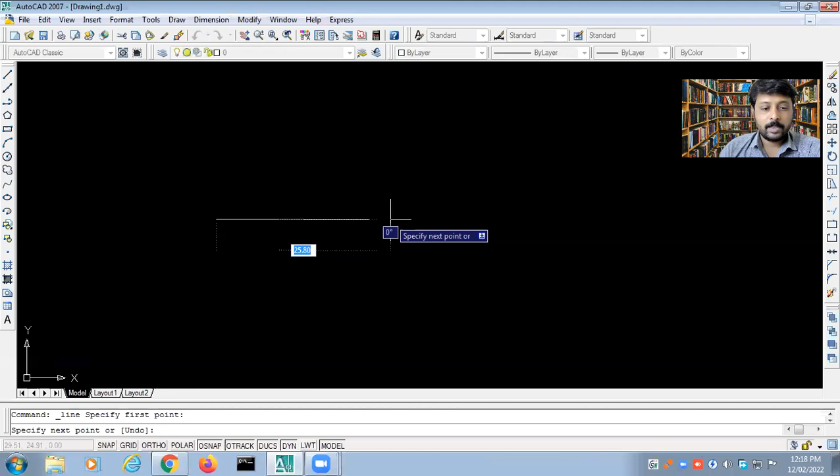So first we wanted to draw a rectangle. So we started with the first point, then we took the length as 10 mm and angle as 0. So we got this line. Then we took the height of the rectangle as 5, so we mentioned it as 5 and the angle should be 90 degrees. So this was looking like this.

Now we had to complete this on the left side. So we had to take the length as 10 and the angle was 180 instead of 0. So yesterday we discussed it, and we got 2 points, and by using escape we are getting this rectangle. This was the thing we were discussing yesterday.

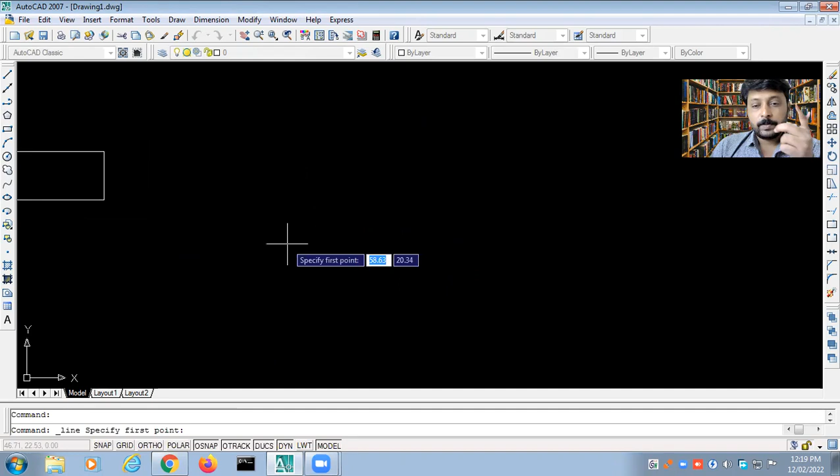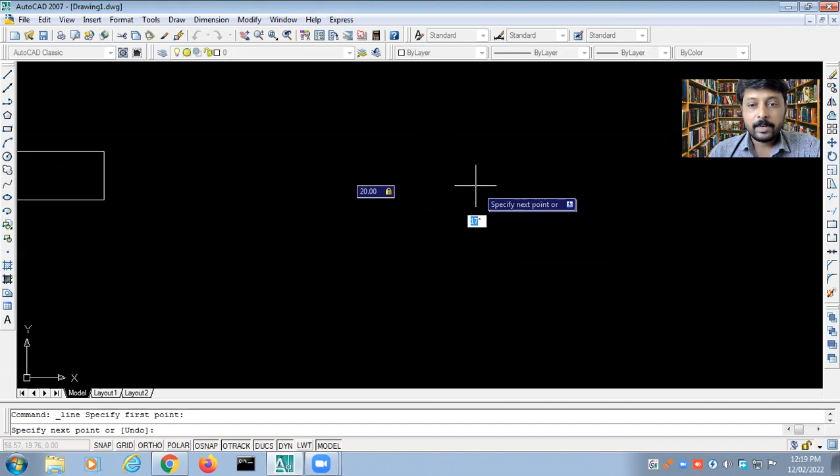Now let us try to draw a triangle. So first, specify the first point. This is the first point. Now let's say the triangle has a base length of 20 mm. So 20, and use the tab key for angle. Now this is the angle, tab, the length is fixed now, but you can see the angle is getting changed. So we want it horizontal, so we will take it as 0. So this is it, 0, and it is completed.

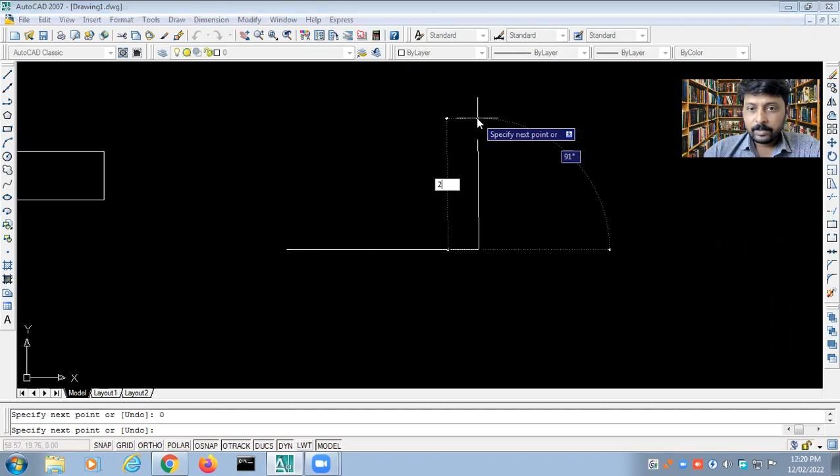Now I want to draw a right angle triangle. Okay, so let us draw a 20 mm length line and the angle should be 90 degrees as usual, as we discussed in the previous point, right? So this is how it is going to look. Now we have to complete the lines. We have the first point, we have the second point, and this is how we have completed a right angle triangle.

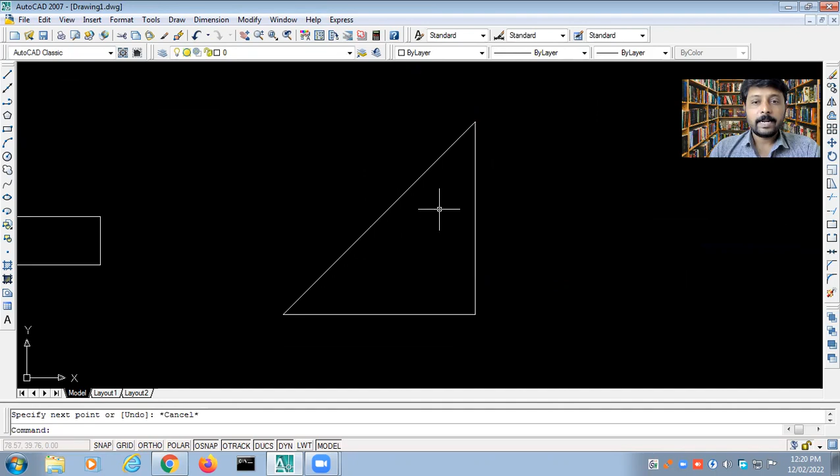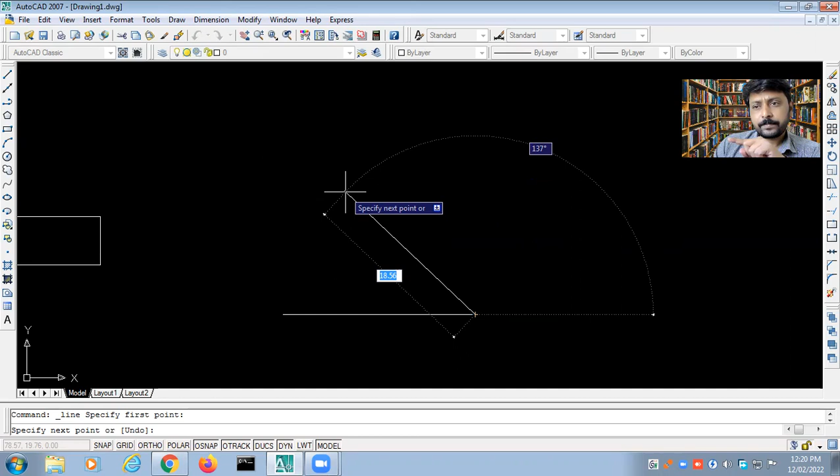Now say we want to create a different type of triangle. Okay, so I would take a point from here. I want to take a triangle having an angle of say 30 degrees. Okay, so as you know, this is the horizontal line. Which one is the horizontal line? This one is the horizontal line.

So if you take 30 degrees from here, the line will go like this. Okay, so this is the 30 degrees, you can observe on the screen. This is the 30 degree line. The length is 18.50, it can be changed, but the angle is 30 degrees. So the triangle is not going to look as we want it.

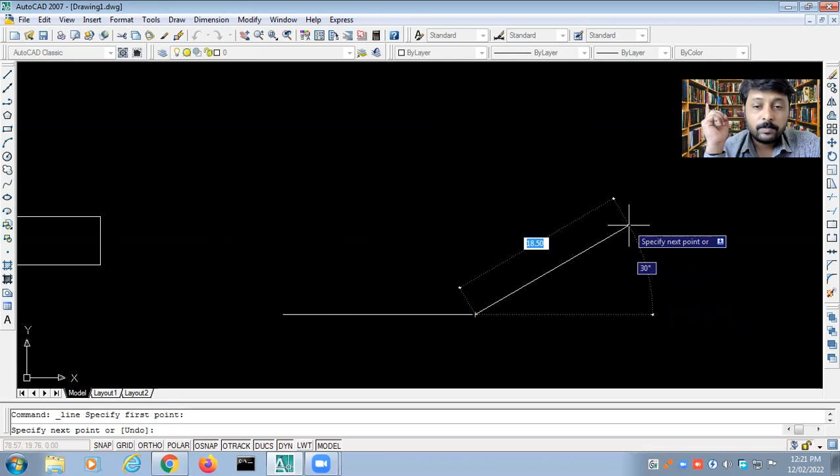So what I am going to do is take this angle from this side, from the left side of the screen. Now in that case, as we discussed in the previous lecture, the horizontal line will start from 0 to 90 to 180 to 270, right? Like that. So when we take 30 degrees from the left side, we have to take this much angle. So this is 90, and 90 minus 30, we get 60. So total 150 from the right side.

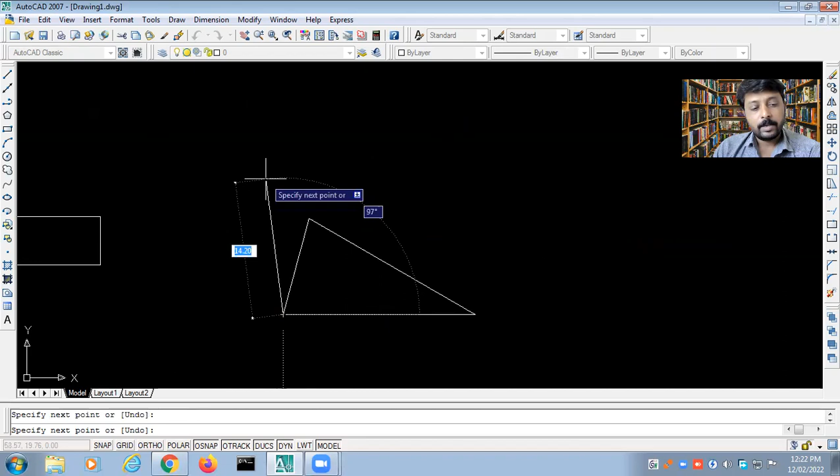So the length should be 20, and tab, and 150 angle. See, this is how it will look. Now I have 2 points, first point, second point, and join this. This is how we are going to complete the triangle. Got it? So I hope you are getting it. It is very easy, okay.

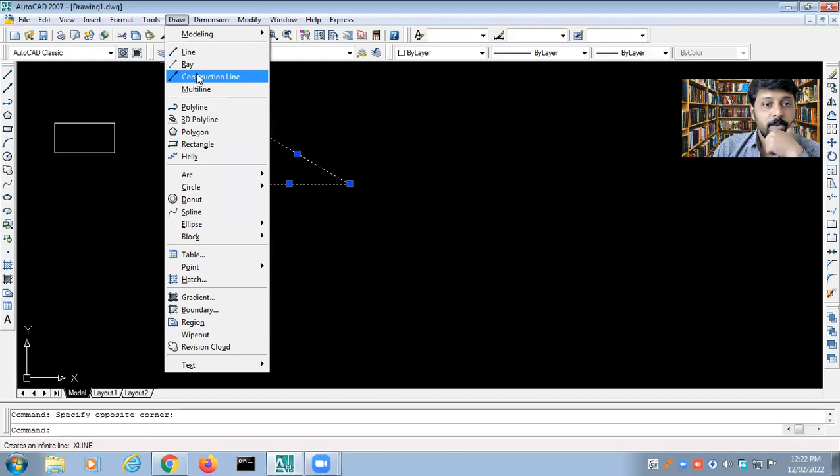Now let us see what other things we have in the draw command. So we have the line command that we have used. Now construction line. Okay, now what happens? Sometimes you have to take the projections. Okay, suppose we take this example only.

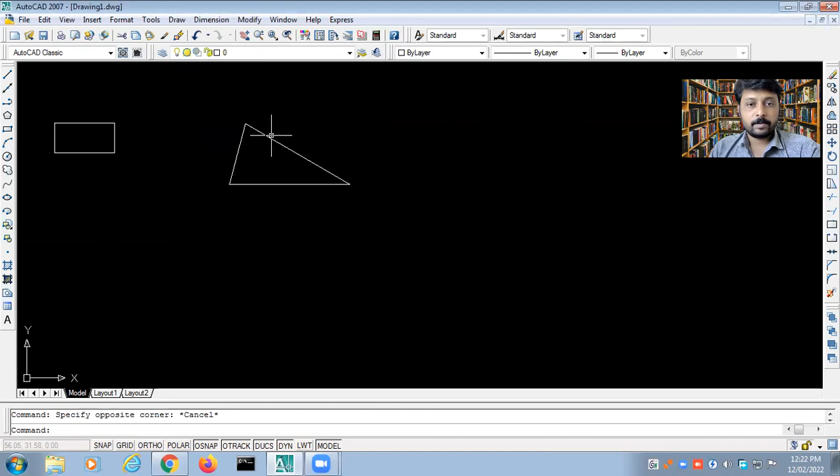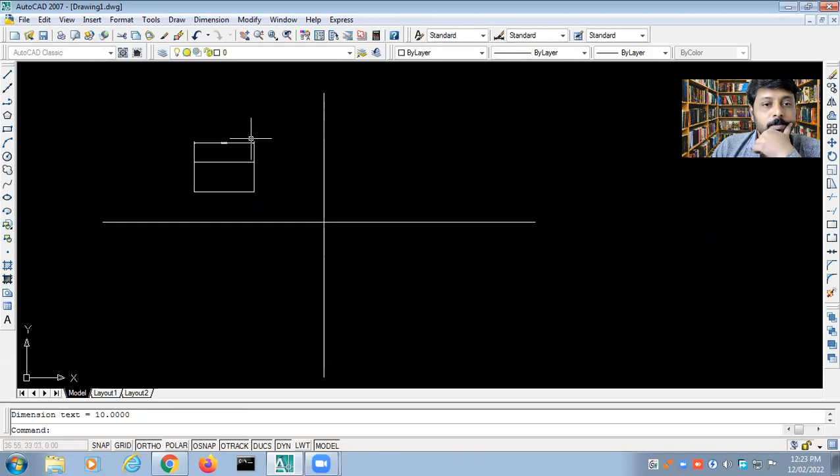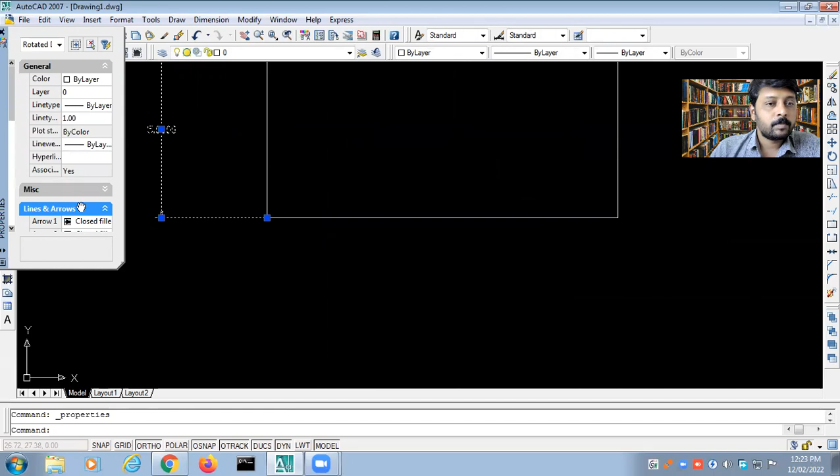Take this example. Just a second, I will take the dimension. Let's change the unit of dimension. Next.

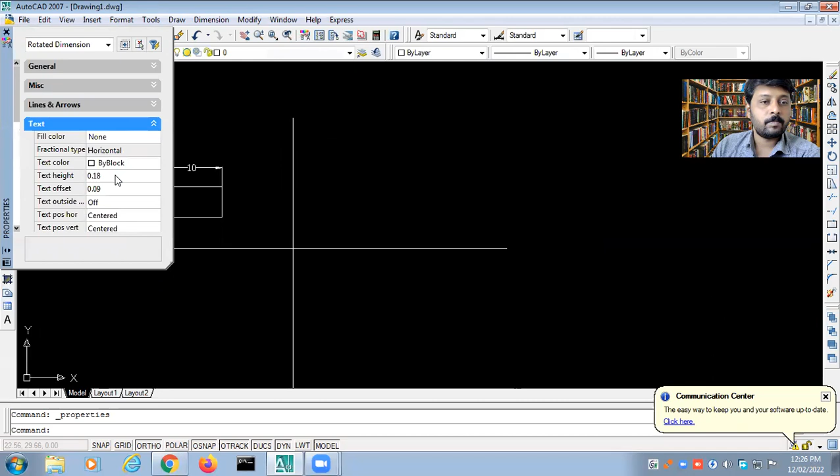Okay, so this is the drawing that we wanted to draw. The length is around, say, 5 mm. Sorry, length is 10 mm and height is around 5 mm. Now we want to draw the projection of this particular object.

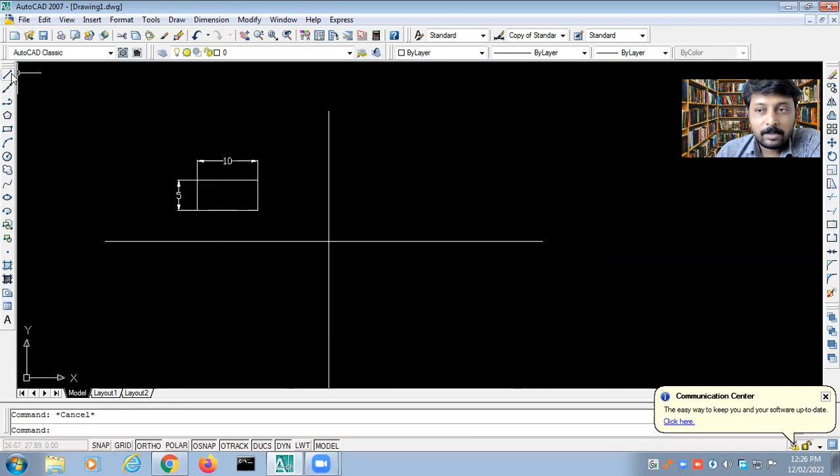Okay, now to draw the projections, we can use line also, and if you don't want to use line, then you can use construction line. See how it is working. Just you have to click over here and you will get the line. So what is the advantage of this line?

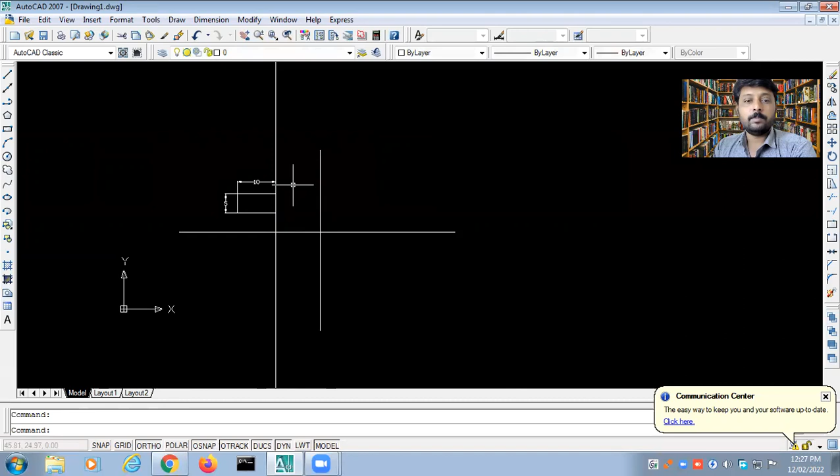Actually, whenever you want to take the projections, you can use this line, and instead of it being a limited length, it actually goes into infinity. So this is how it will look like. So if you reduce the scale, you will get to know how this is going to be. So this is how it looks like. Okay, so these are called projection lines or construction lines.

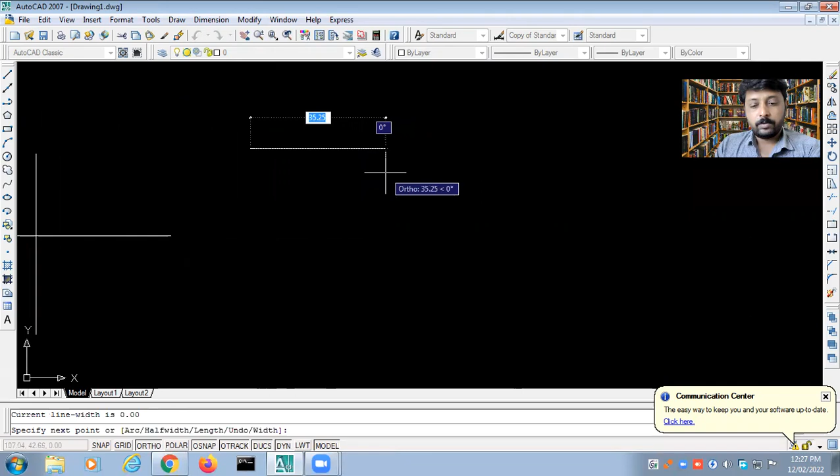Then we have, in draw command, polyline. Actually, polyline is what we have used. Specify the first point. I want to draw a line of, say, 20 mm with an angle of 0.

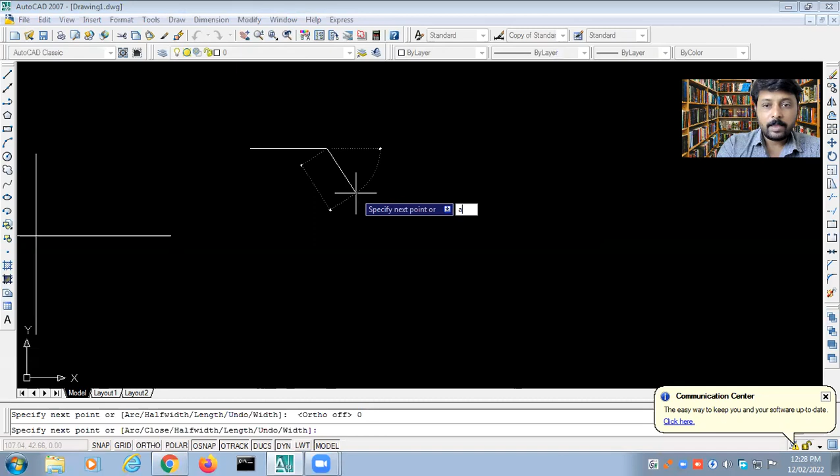Now I can draw an arc by using the same command. For that, I have to use A. You have to type A and enter. Now you will get this arc. You can specify the dimensions of the arc, say 20 mm, and the angle is 90 degrees. Enter. So this is how arc is going to be used.

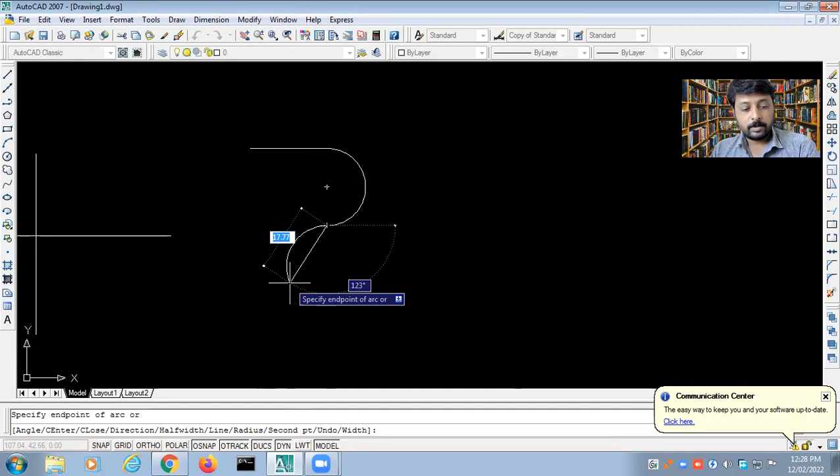Then, if you want to draw a line again, you have to type the letter L and enter, and you are going to get the line. So this is the command of polyline. In polyline, you draw a complete drawing with the help of only a single command. So line is there, arc is there, polyline is there. These are the basic things you can do with the polyline.

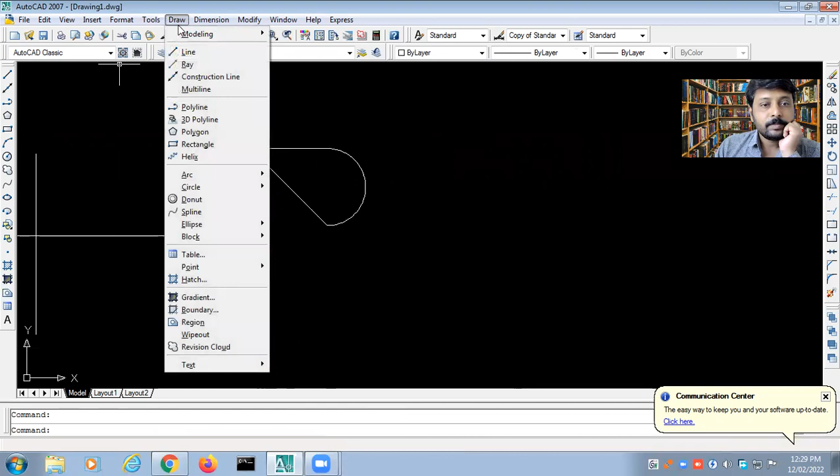Then polygon. This is very important. Polygon means triangle, rectangle, square, pentagon, hexagon, octagon. These are the different types of polygons. Basically we draw this triangle, and after that we can get n number of sides to a component or drawing.

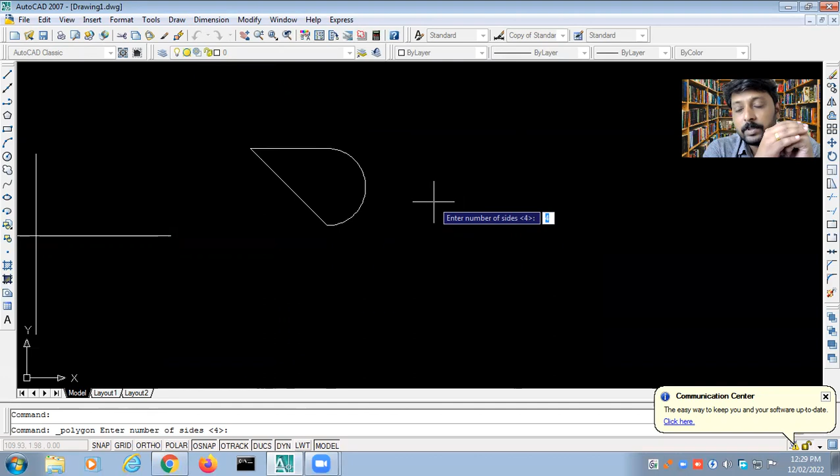So that can be drawn with the help of polygon. Suppose you want to draw a pentagon. How to draw a pentagon? When I select this polygon, it asks us for the number of sides. How many sides does a pentagon have? It is 5, so I put 5 and I enter.

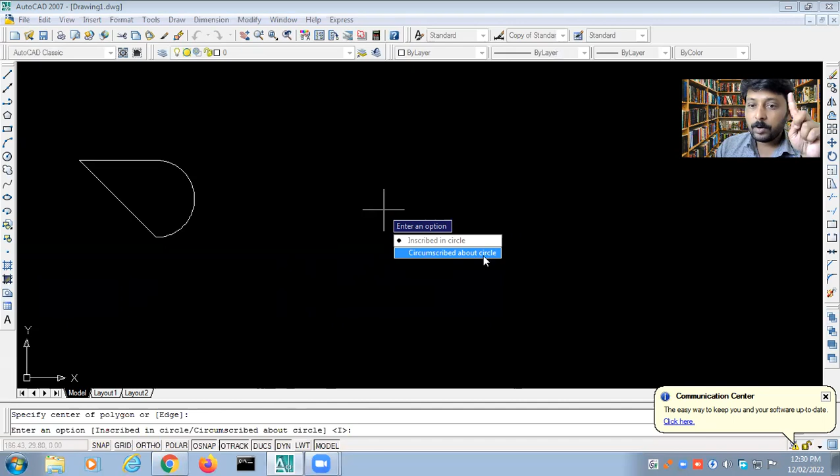Now the center of the polygon has to be fixed. There are two things you can do with this polygon: it is inscribed in the circle, or it is outside of the circle, circumscribed about the circle. Now what is inscribed and what is circumscribed, I will show you. First we will draw with the inscribed in circle type. I will select inscribed, and you get the radius like this. Say I want a radius of 25 mm. So this is how it will look like.

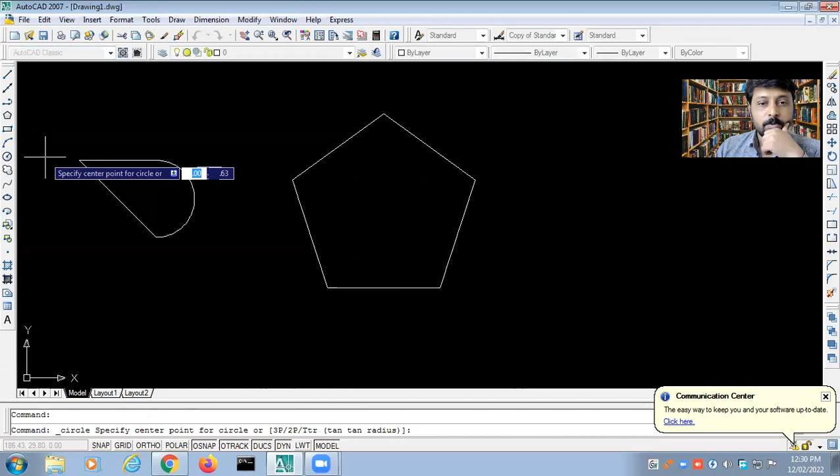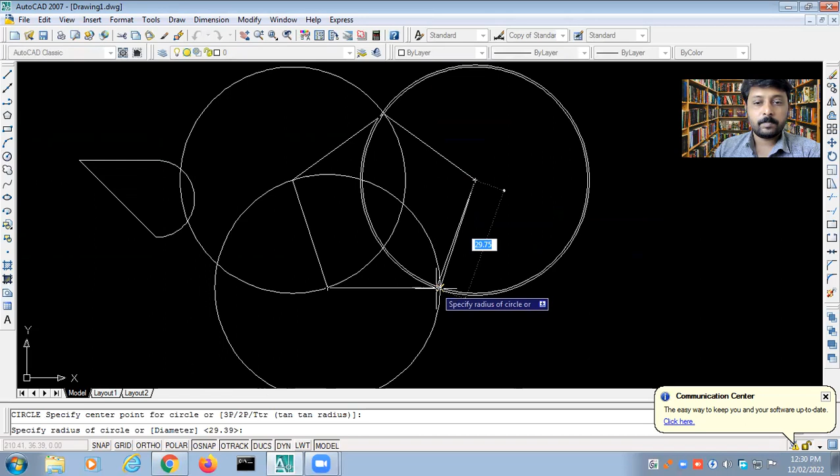So when suppose you draw a... just a second... so this is the inscribed in the circle type of thing. Let me draw, I have to take it.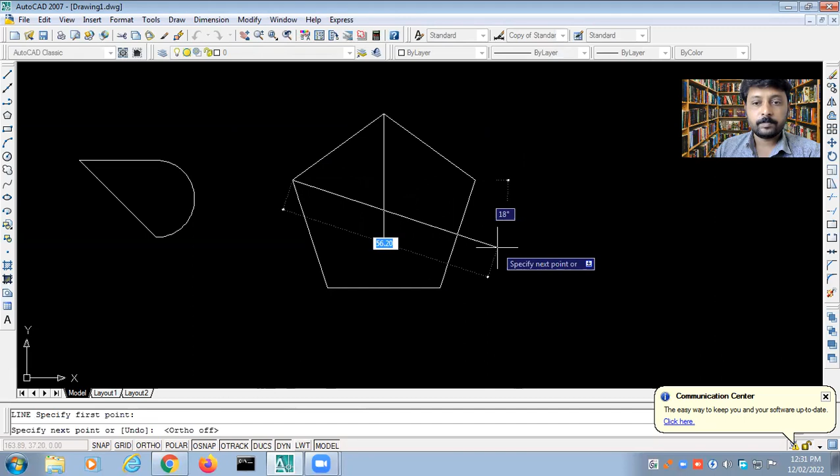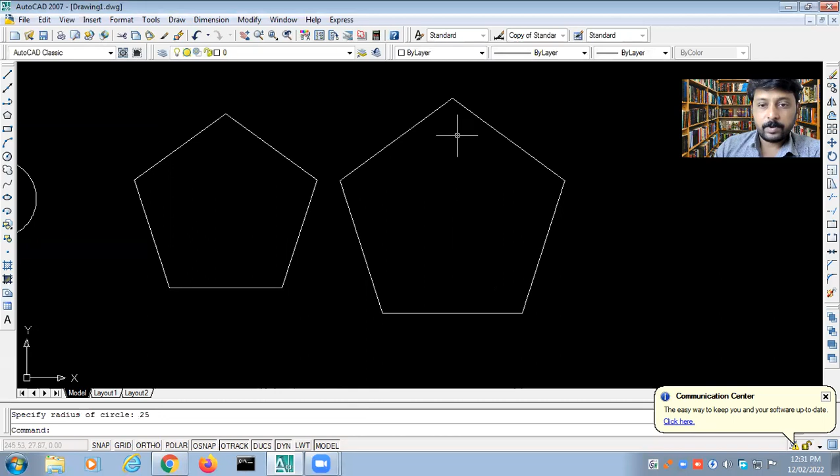Now suppose I want to draw a polygon, a pentagon. Enter the side 5, then circumscribed. Now I will take the same dimension, 25. This is also 25 radius, this is also 25 radius. So what happens, just a second, I will take a radius of 25. See, actually this is how it happens.

So this is the circumscribed about circle. This means we drew this pentagon from outside the circle.

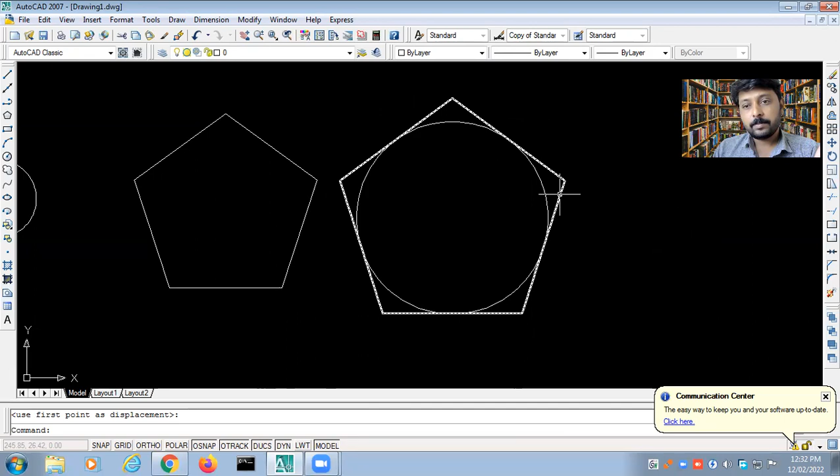And this is, just a second, I will show you how it works. So this is inscribed in the circle.

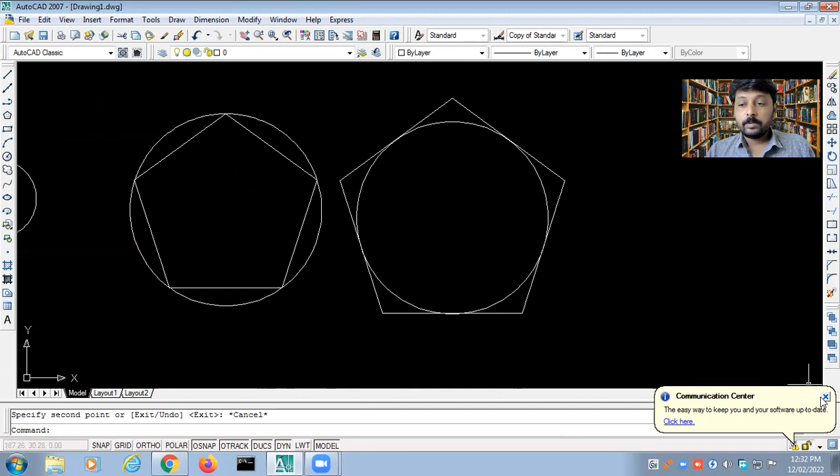Now, say what happens... just a second... okay... suppose I want to draw a hexagon.

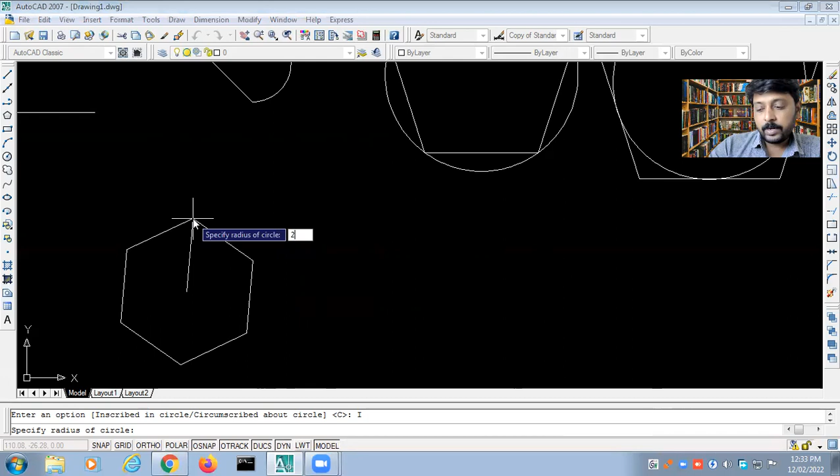Let us draw a hexagon over here. I will take the polygon. How many sides does the hexagon have? It is 6, so I take 6. I take the center point. I will take inscribed in the circle, and I will say the radius 20. Let us say it is 15. So this is the hexagon.

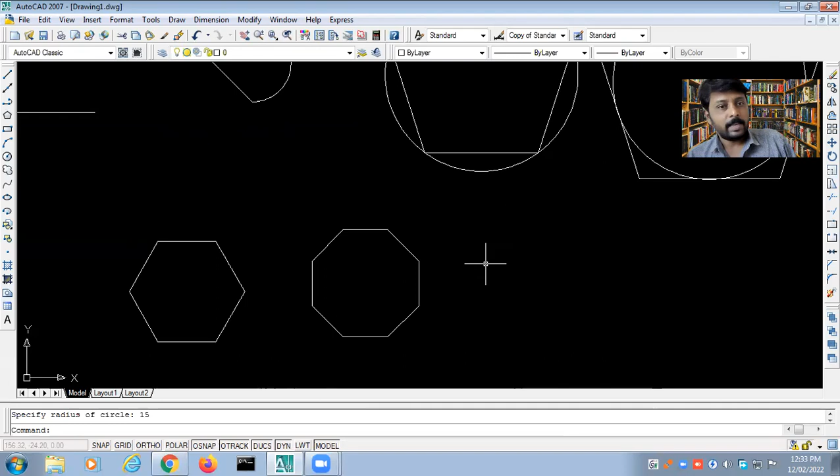Suppose I want to draw an octagon. 8 sides, center, inscribed, radius 15, octagon. So this is how you can directly draw hexagon, octagon, or any polygon with a number of sides. So this is how you are going to use this command of polygon.

Now there is rectangle. As usual, you have to first define the first line and first point, and you can get a rectangle with an infinite number of length or height. If you see this particular drawing, we have started from this point. So I am taking this rectangle to the below side.

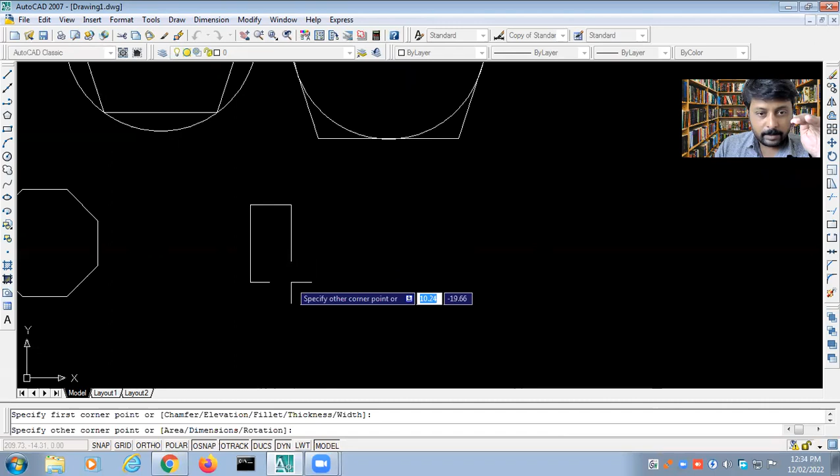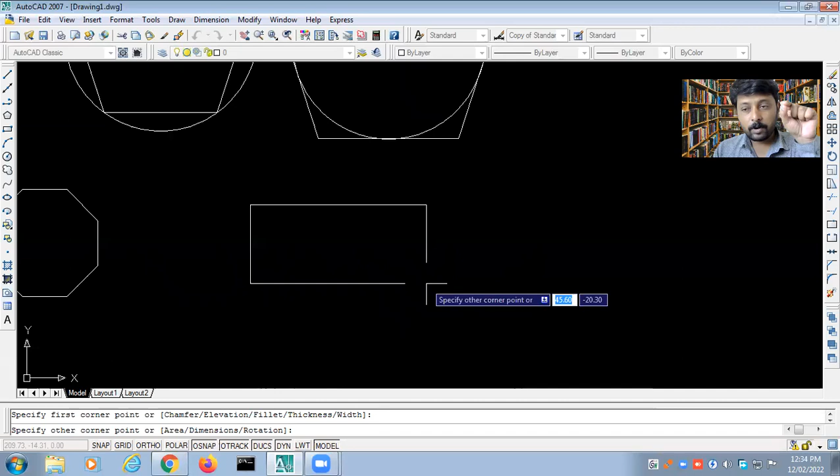So now, at the below side, you can observe the length and width. Actually, length is 45 mm, and height is 20 mm, but it is minus 20 mm. Why? Because we have started from above that point, and from that point we are taking the line below. Now what happens if I take this above? It will be positive.

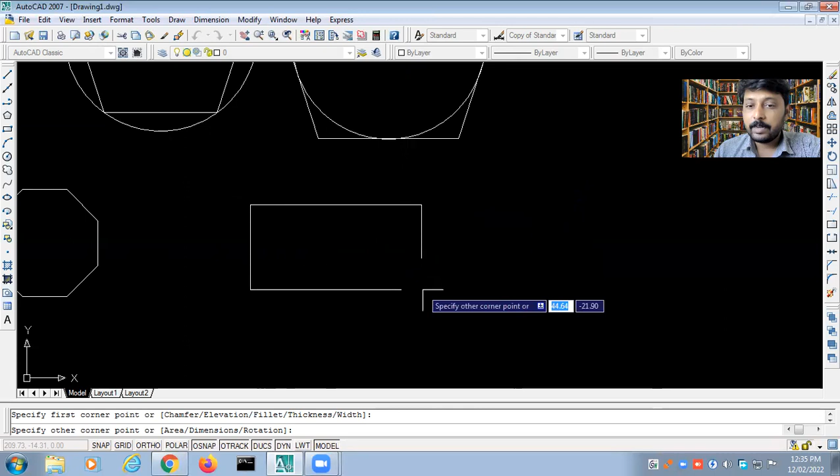So that you have to keep in mind, the first point of reference is very important. From that point, wherever you take the cursor, you can see the negative or positive values. So this is rectangle, how you can draw. I can draw any type of rectangle, any length, any width, any type. So this is how you can draw the rectangle.

Now there is arc. So arc, just now we have drawn arc, right? Just a second, I will take it over here.

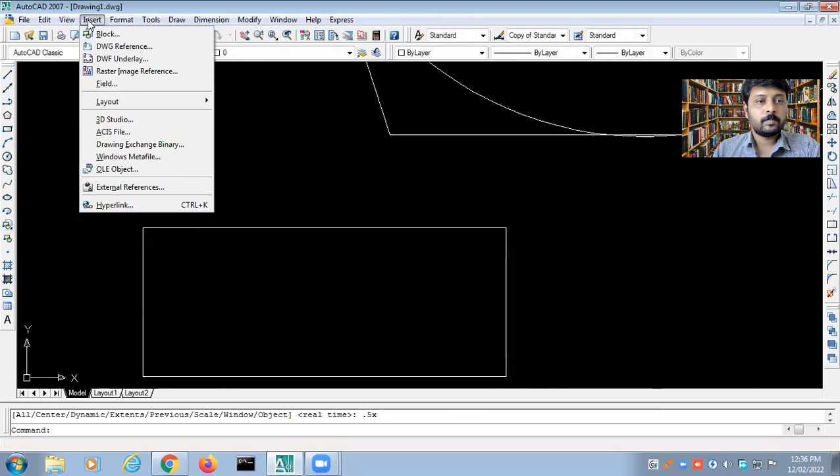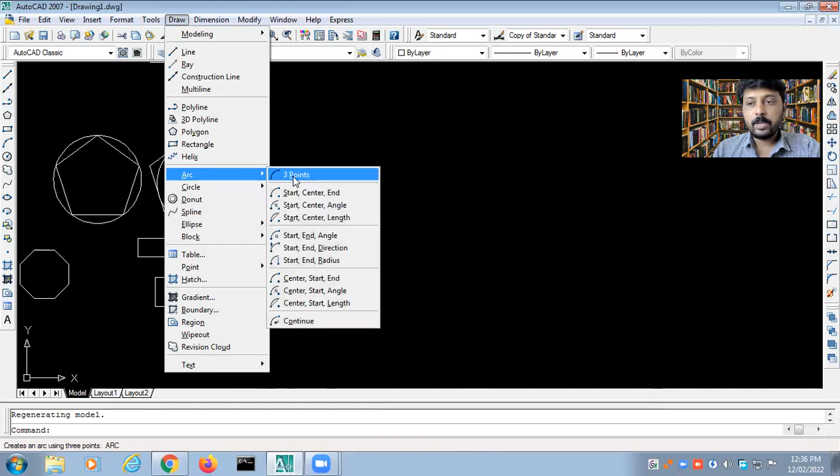So we were discussing about arc. Okay, so 3-point arc, what happens? First point, second point, third point. 1, 2, 3. If you have 3 points, you can draw it directly like this.

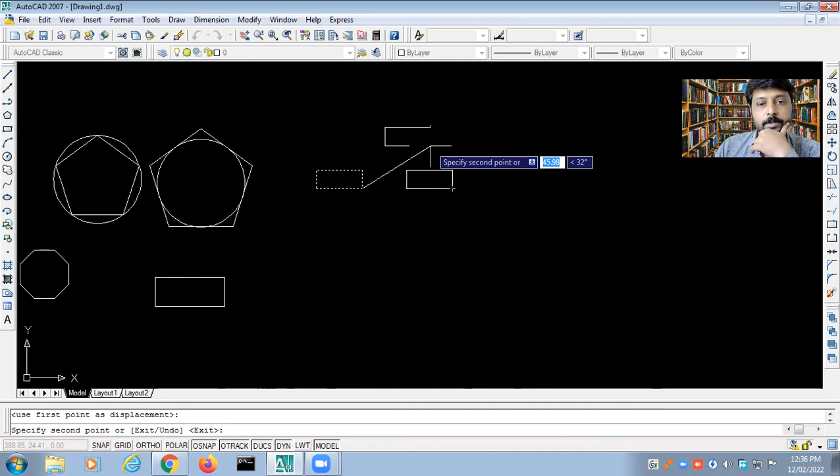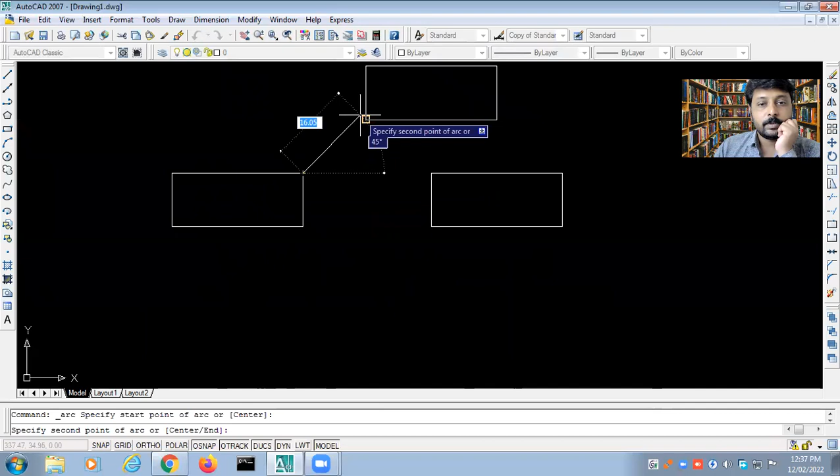For example, say I have this point here, then another here, and here. Now I have these 3 points, 1, 2, 3. I want an arc which can go through these 3 points. So I will go for arc, 3 points: first, second, third. This is how I can complete the arc.

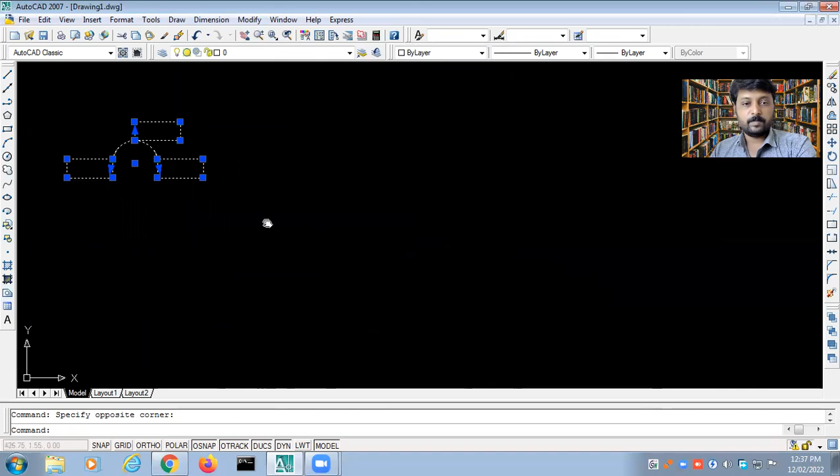This is the first type of arc. Then there is start, center, and end. Now what happens? Draw arc, start, center, end.

For example, say I have this line over here. I want to draw the arc over here. I know the center point, suppose. So I will go to arc, start, center, end. This is how I can create an arc. So this is another type of arc.

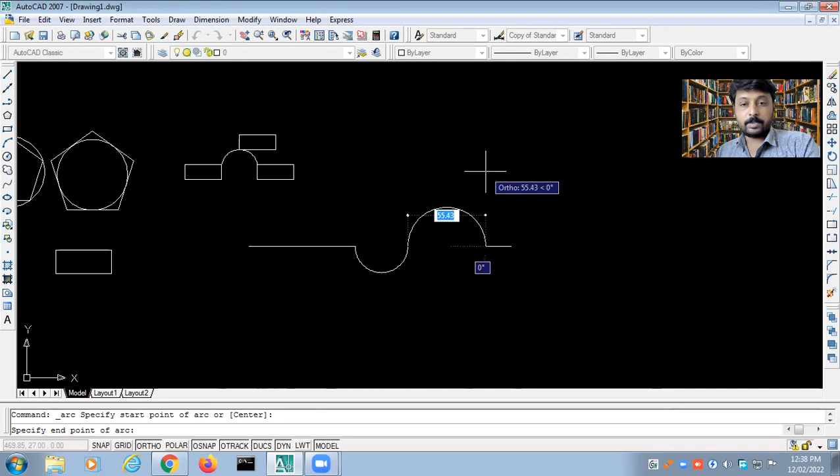Next type of arc is start-center-angle, start-center-length, start-end-angle, start-end-radius, start-end-direction, center-start-end, center-start-angle, center-start-length, and continue, from this line to this line, continue type of arc. This means you can draw any type of arc from the options available in the draw command.

So I hope you could make practice of it. Do practice on this, then you will get to know how to draw these particular arcs.

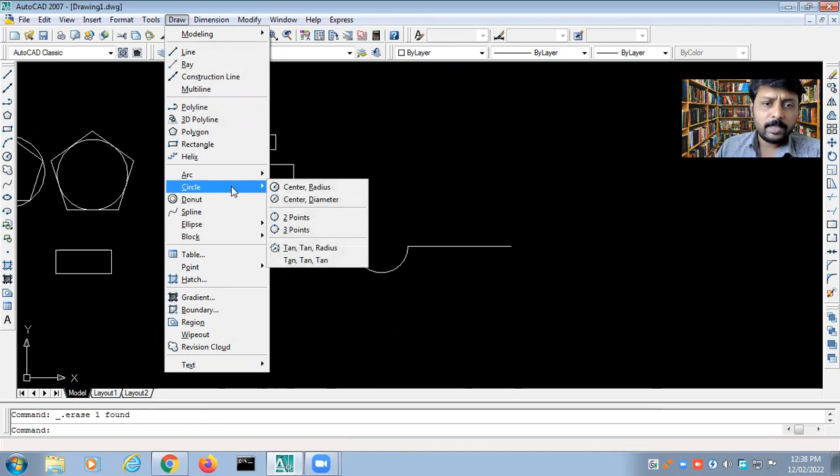Okay, let us see what we can do with it. So first, circle, center, and radius.

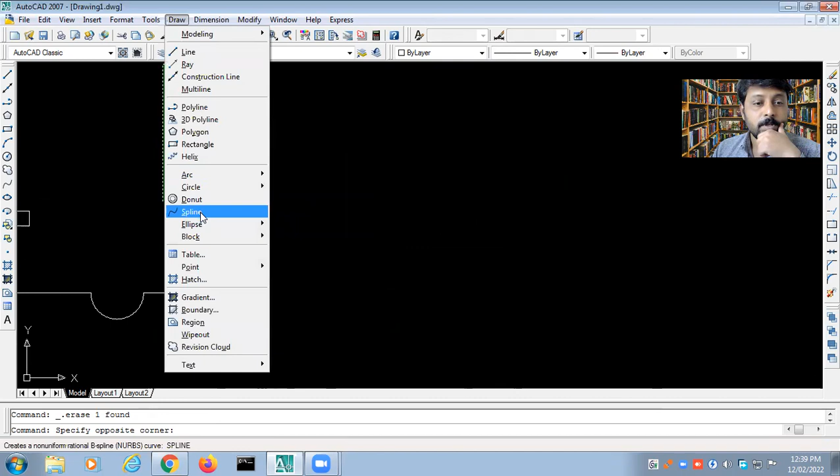I know the center, center is here. I want radius, say it is 20. This is the circle. Now I want to have a circle with center and diameter. I know the center and I know the diameter, which is say 50. This is it, how you can draw the circle.

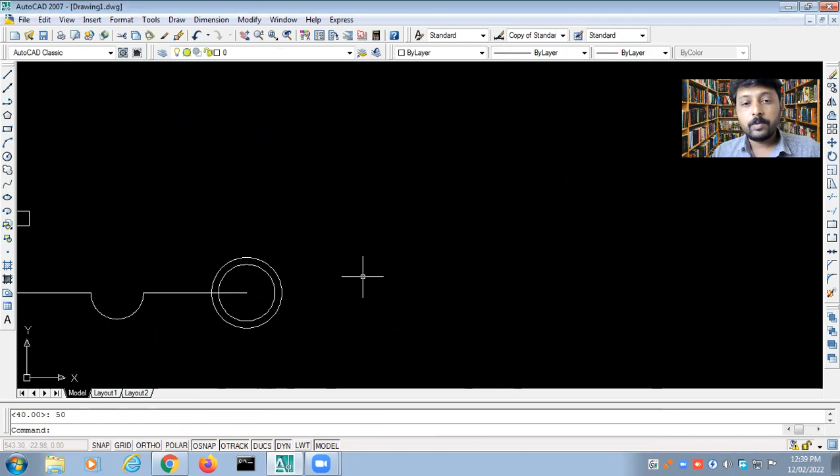Then go for next, 2-point circle. Now say I have these 2 points, 1 and 2. I can draw a circle which passes through these 2 points, 2-point circle. Yes.

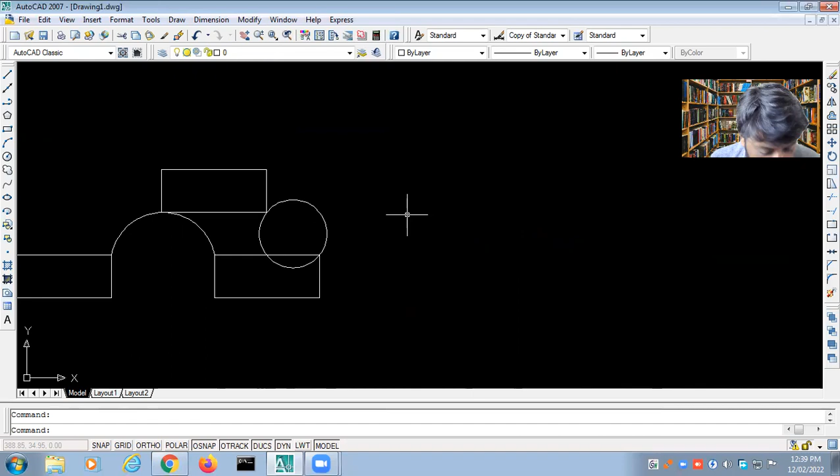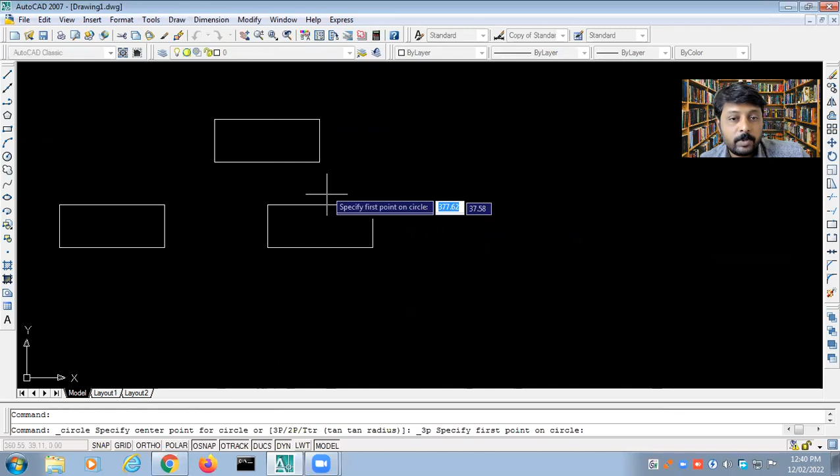And then next we have 3-point. Now I want a circle which can pass through 3 points. Let us see how it is drawn. Suppose I have these 3 points, 1, 2, 3. This is how it is going to be passed through. So I hope you are understanding this.

Then we have tangent, tangent, radius. Now tangent means I want a circle which is tangent to this line, tangent to this line, and say circle radius of 5. It is not possible with this.

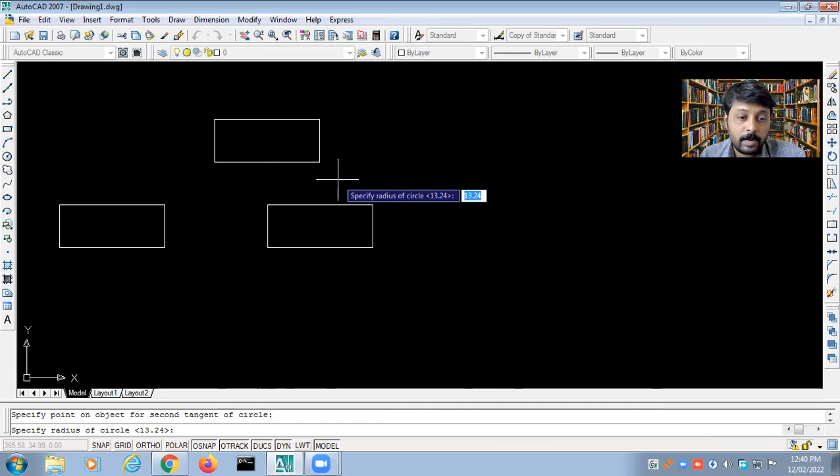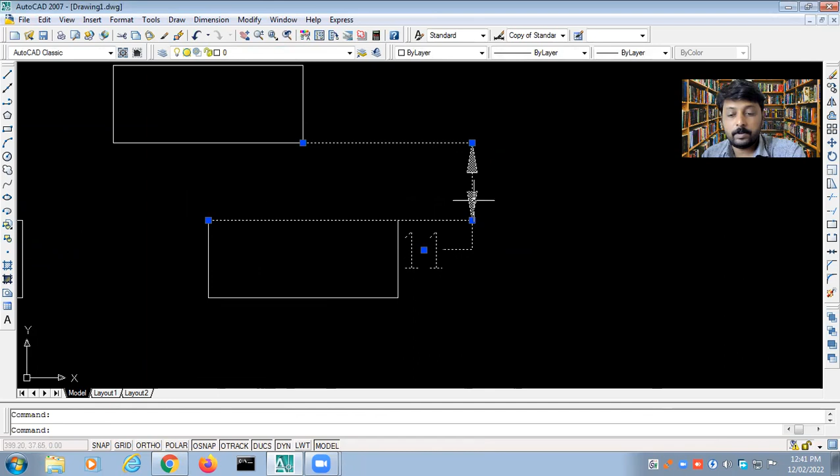So you should know how much distance is between these 2 lines. So first line, second line, just a second, let me check the dimension. It is almost 11. So let us see what we can do with tangent, tangent, radius, tangent, tangent, 6. No.

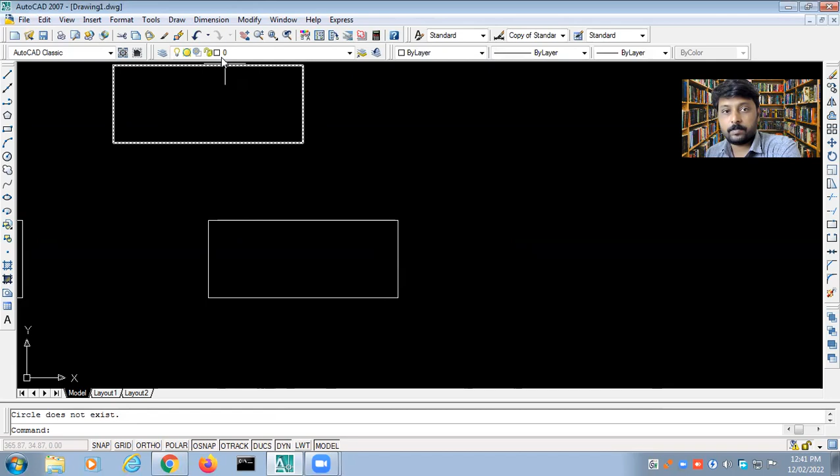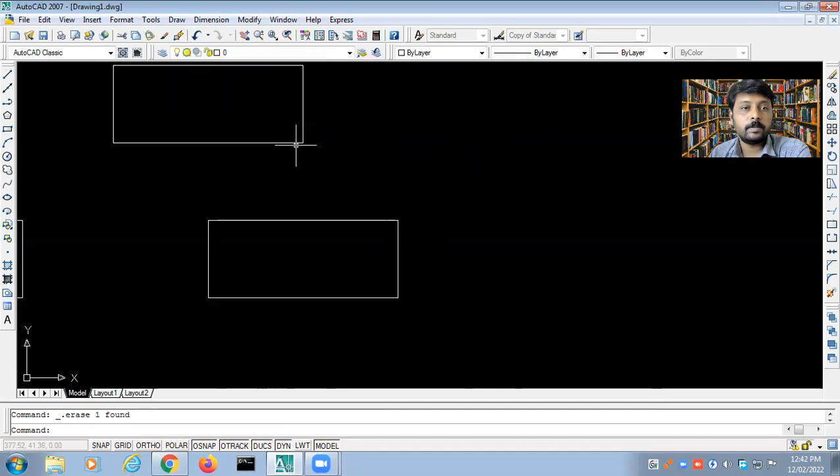Just a second, tangent, tangent, 5.5. No, why it is not taking? Tangent, tangent. I must have the actual length of this particular thing. It is actually 13. Let us see what happens with 2.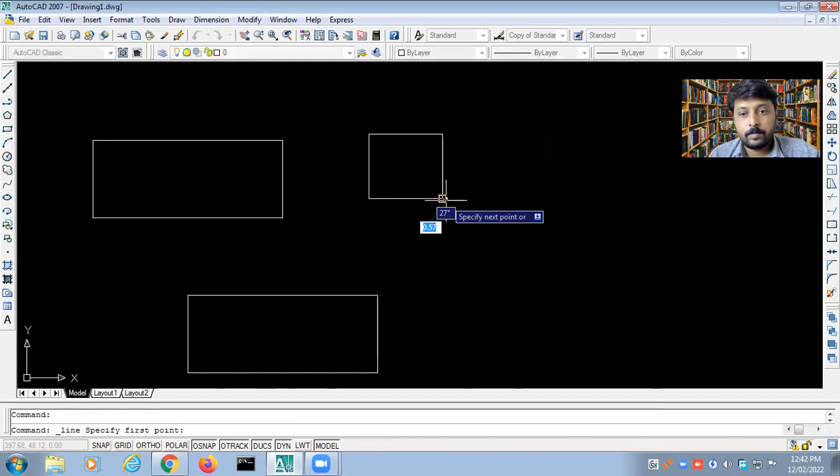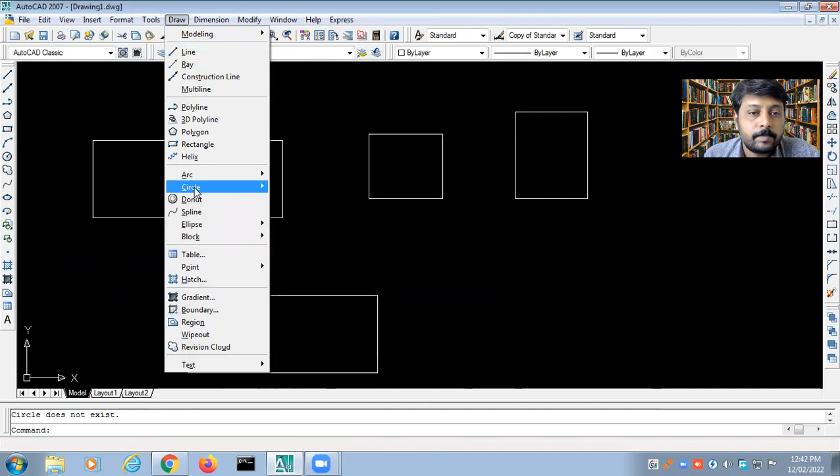Let us take another example over here. Now we know the distance. Now let us see tangent, tangent, radius. It is not getting. Okay, so we were putting the radius which is very less, so that was the problem. Tangent, tangent, radius 5. Tangent, tangent, radius 3. No.

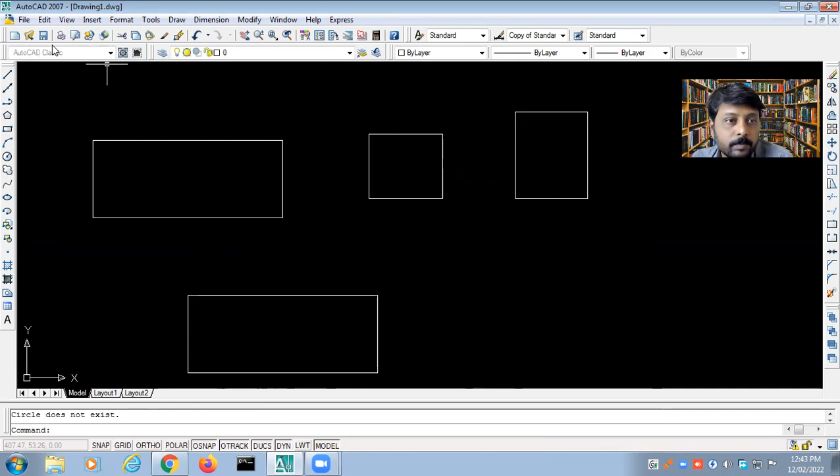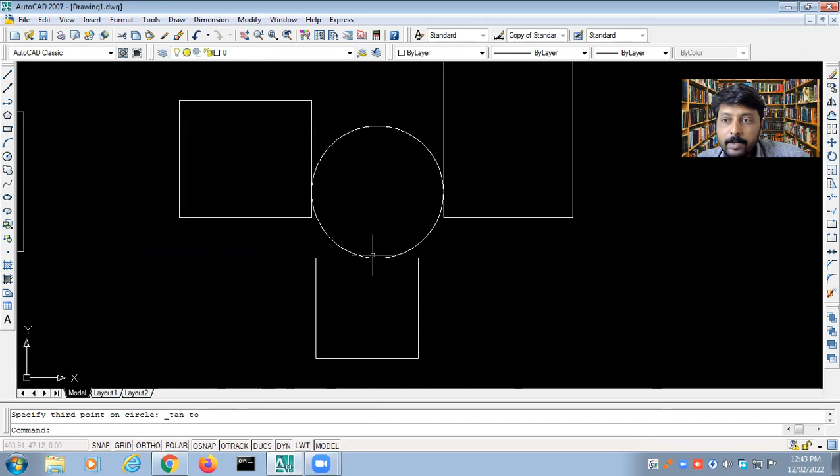Just a second, I will draw another rectangle. Draw a circle, tangent, tangent, tangent. So this is how you can use the tangent, tangent, tangent thing. 3 lines are there, and there is nothing to specify the tangent radius, so you can directly use 3 tangents and draw a circle over here. So this is how you can use circle with tangent, tangent, tangent, or this tangent, tangent, and radius.

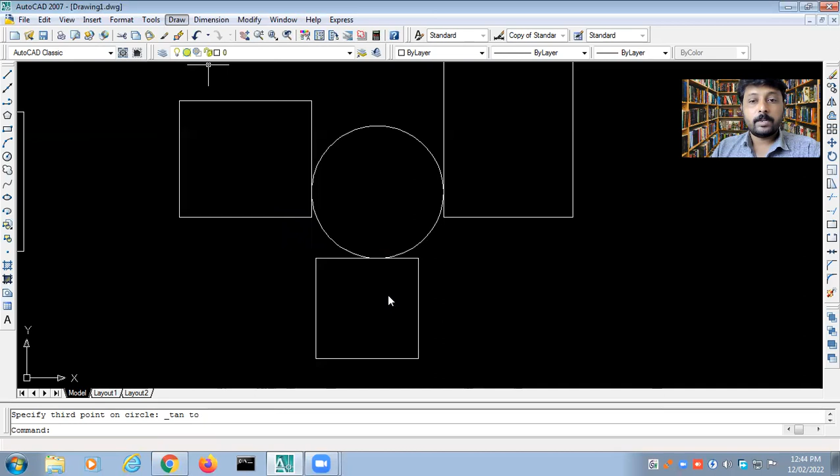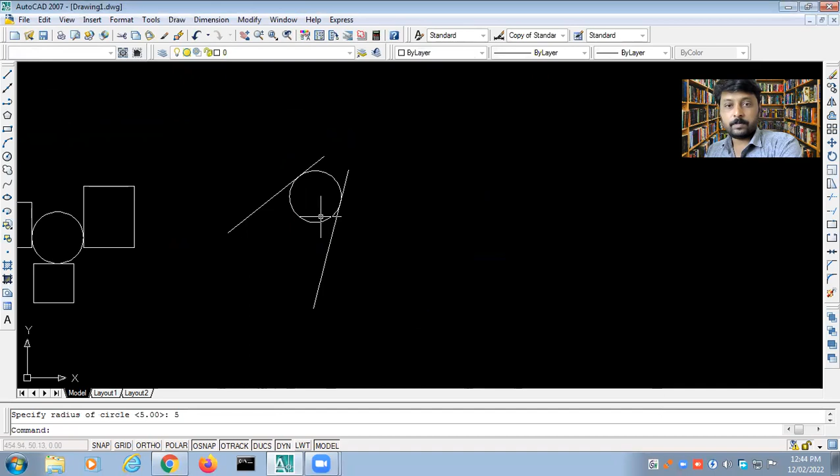For this thing, let me see what I can do with it. Suppose these are 2 lines, and I want to draw a circle in between them. So it is tangent, tangent, radius 5. This is how you can draw. So wherever it is going to be fixed.

See, now see what happens. Tangent, tangent, I had taken 5 right now. Now I will take 6. So it will go on increasing. So this is how it actually works. So this is about arc and circle.

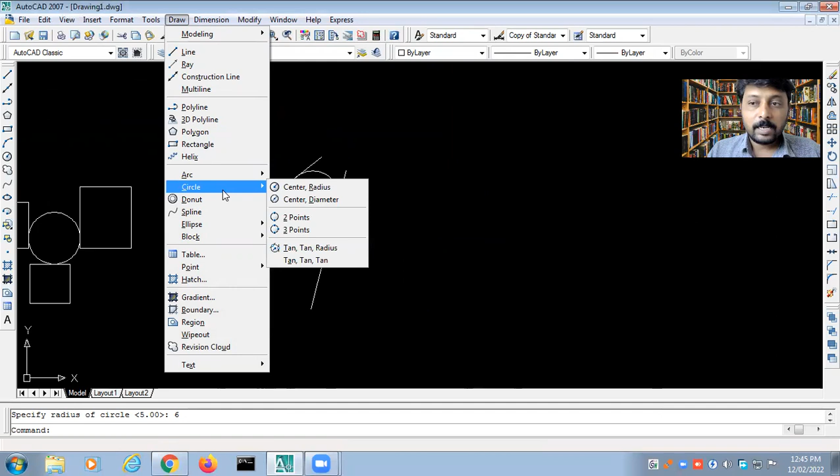So we have seen line, polyline, construction line, polygon, rectangle, arc, circle. Now in next lecture we will continue with ellipse and then hatching, etc. Then we will go ahead with the rest. So this is all about today's lecture, and I hope you understood this.